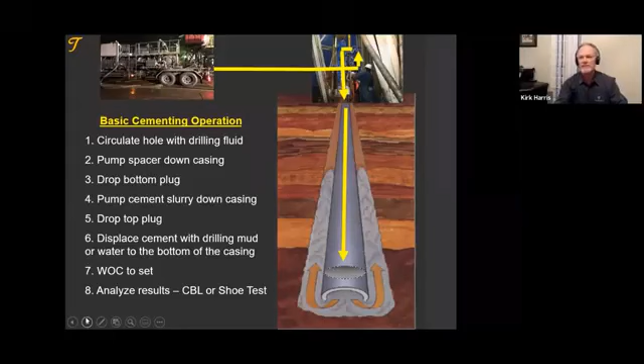We will be talking about primary cementing, but there are two other areas we could spend a lot of time on. Squeeze cementing, or remedial cementing, where we're fixing holes in the casing, fixing the cement job, or fixing formations. And plug cementing, where we're setting plugs of cement in the well for a variety of reasons, maybe to kick off and drill a new hole section, or to abandon a well. We're going to focus on primary cementing for our discussions in this introduction to cementing this evening.

And I think we are back.

So let's talk about the casing strings themselves, and again we're looking at the basics here. The first string that we set is the conductor. Offshore, sometimes that conductor is just driven into the sea floor - pounded in. Sometimes we drill a hole and cement that conductor.

On land, sometimes we use a rat hole drilling company, just dig a hole and drop some casing in there, maybe put a bulldozer on top of the casing to hold it in the ground. The first job I ever caught was a conductor pipe, and I thought, wow, this cementing stuff is pretty primitive. But it's the first short string - it may be anywhere from 80 feet to a couple hundred feet of conductor. We center the rig over that first string, and that begins our well.

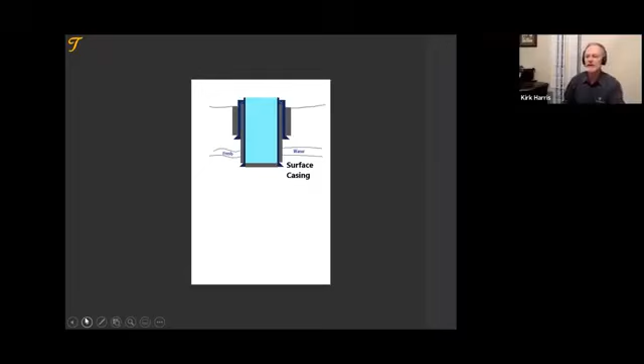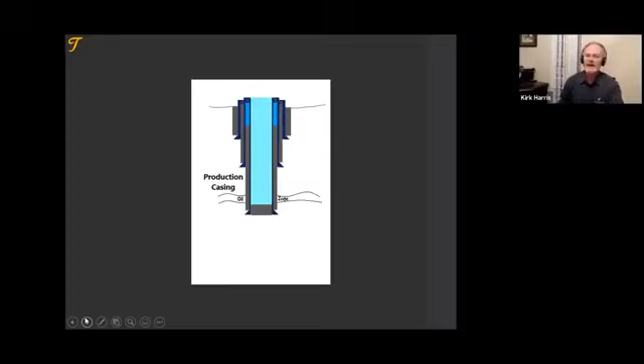Our next string might be the production casing as we telescope the casing strings into the ground, and here we'll be covering the oil zone or the gas zone. If we have not yet reached our target, this might be an intermediate string, and we will drill out and drill deeper. We might set, instead of a production casing, a production liner, or if we're drilling deeper, a drilling liner.

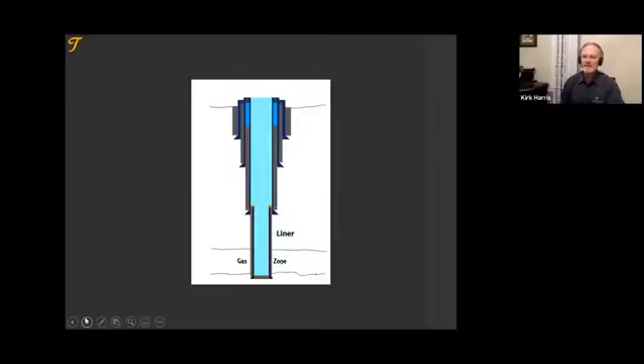Now we're running on drill pipe a shorter piece of casing, and we will cement through the drill pipe and casing, then hang the liner off on the previous casing. Sometimes we'll connect that back to surface, and that is called a tieback string, and we will cement that string in place on various occasions.

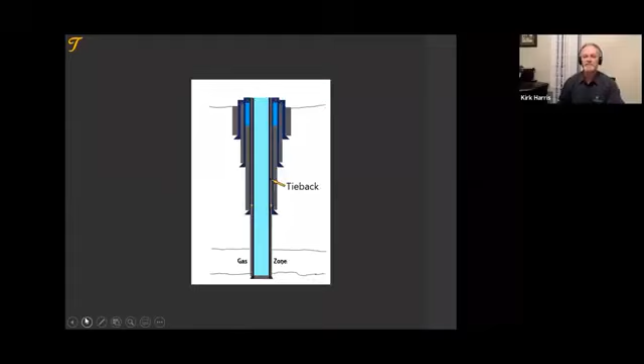Why do we cement? Why do we do that? There are 4 reasons I will list - there may be a couple more, but we umbrella these under about 3 or 4 reasons. Why do we cement? And I ask questions because I want you to talk with me. Plus, it gives me a chance to enjoy my coffee.

Why do we cement? What are the reasons?

Thank you, Sebastian. Well security or well integrity. Thank you, Adele. Or Addo, not sure how to pronounce that. To isolate, for zonal isolation as a barrier. Thank you. Thank you, Perwanto. That's right, Sheila, to provide zonal isolation in the wellbore.

That is number one, to seal formations that have been drilled. We can isolate production water zones, weak zones, and stimulation treatments. Okay, thanks, Derek, to satisfy the government regulations. And the regulations are trying to achieve, in part, this zonal isolation.

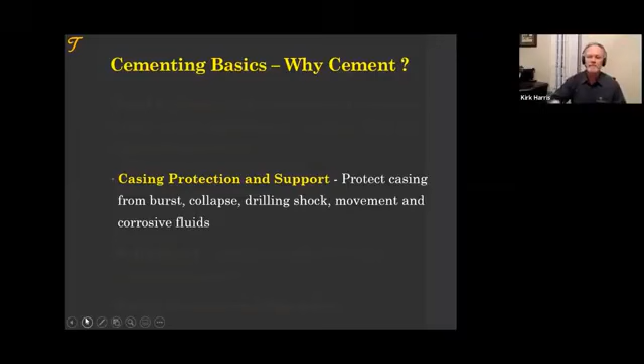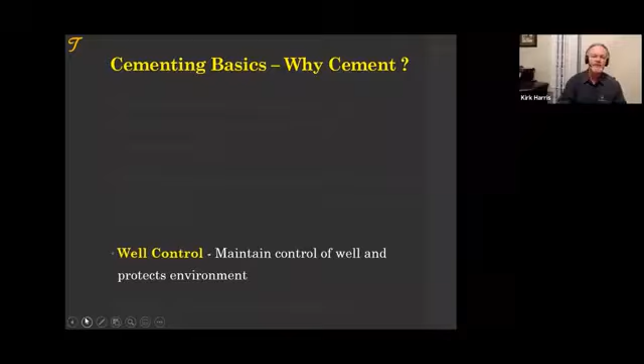Somebody mentioned, Raphael, you did, well control - to maintain control of the well. Again, we're cementing as we go down to protect ourselves from weak zones and from high pressure zones. It's a form of zonal isolation. And then finally, as you've mentioned, satisfying governmental regulations.

I don't know what you were doing last night in Australia or the Philippines, but were you thinking about your cementing philosophy? I don't know how many of you have thought about your philosophy of cementing. By philosophy, I mean a big general idea of how do you get a good cement job, how do you achieve those objectives of protecting the casing and getting zonal isolation?

When we cement, we want the cement to come up to the right spot and seal all the way around the casing. We want it to go into the right place and provide zonal isolation. Some big general ideas - cementing a wellbore or cementing a well is like, here's what you do to get a good job.

Okay, Fahid, you want to go to CBLs? We're not going there yet. Is that your philosophy? I like CBLs. To get a good CBL. What is your philosophy for cementing? Sheila, do you have a philosophy for cementing yet? If you're watching this by video, this is the part where you just get to think.

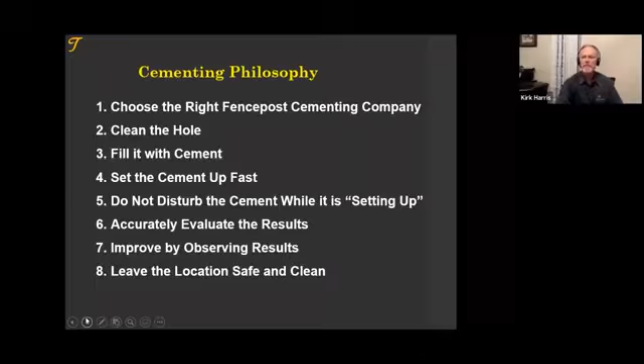I'm not making fun of service companies, but what I am saying is choose the best one. Choose the best team. Get the best team you can get.

You're going to have some engineers who know the issues, know the problems, know the solutions. You're going to have some who will just bring breakfast to the office and not have those answers.

We're going to clean the hole. We're going to liken that to the way we clean dishes in the sink. We kind of do it the same way in the oil field.

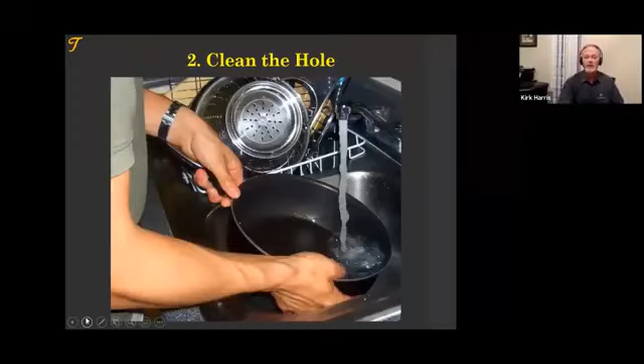We're going to fill the hole with cement. A fence post hole is easier to fill, trust me, than the oil field hole. In our oil wells, we have to pay a lot of attention to being able to get the cement where we want it. We want to set the cement up fast.

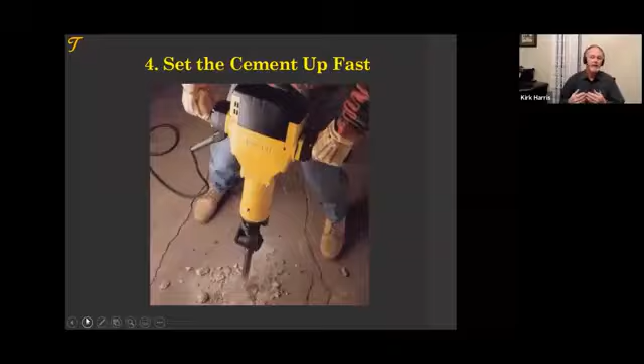We're going to have a little debate later about how to stop flow into the well. Can we do it with gel strength? We talk about gel strength and critical static gel strength a lot. Or do we need to set it up fast? I argue for setting the cement up fast and do not disturb it while it is setting up.

We talked about the catastrophic flows. Almost half of those catastrophic flows in the Gulf of Mexico occurred after cementing, and they occurred as we disturbed the cement while it was setting up.

Accurately evaluate the cement job. Sometimes the bond logs are more difficult to read than the map around Kosovo of the roads.

I would be lost in this country.

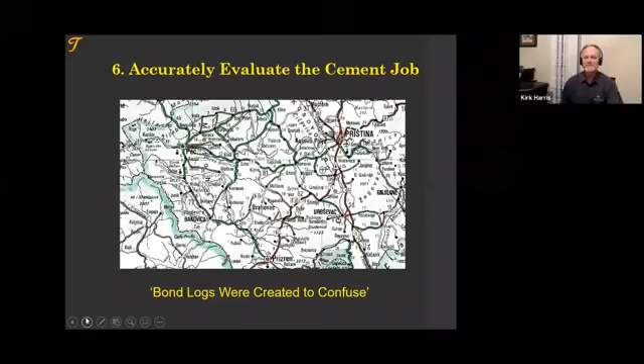Improve. We monitor results wherever we worked, whether it was at Oxy or Repsol or Talisman. We need to get above 95% success.

Because you have one success, that may not mean you're using the right answer. It has to work almost every time. We'll talk about that when it comes to float equipment, for example, here in a bit. If it's not working at least 95% of the time, you need to be working hard on a better solution.

And then safe and clean. I think this is still the world's tallest building in Dubai. They say, I haven't seen this, but they say that the men cleaning the windows do it year-round, up and down. It is clean. I don't know about safe.

Let's talk about job design. What we're going to be looking at with job design is making sure we have the right volumes of cement that we're pumping. We want to make sure we have the right density and we're pumping at the right rate. Both of these will cause pressures in the wellbore.

We want to have the right slurry design. Besides density, there are other important properties. We'll be spending an entire webinar on designing the slurry and another one on testing the slurry, so here in the future.

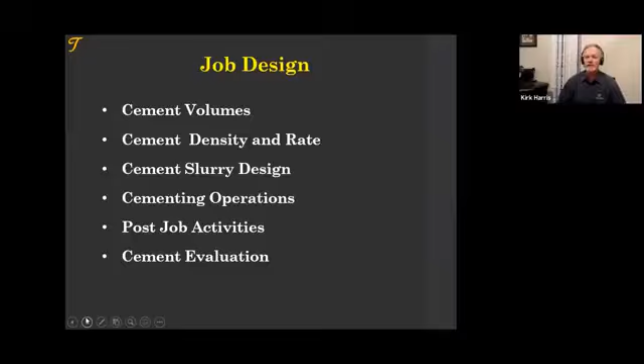When it comes to cement volumes, I have this. I actually have 3 copies here that sit around my desk. I constantly am looking at the red book. I don't know why I don't just memorize everything. I have some memorized, but I use the red book.

Many of you may have a blue book or red book on your computer electronically. I don't know, at a certain age, you can only read things on paper. It's a crazy deal. But we're looking for volumes, and we get the capacity and we get the factors for those volumes in this book.

We're looking at the open hole volume. We're looking at the casing by casing volume as we lift cement up into the previous casing. We're going to have a volume of cement that's in the shoe track. And we'll have a volume.

It's the Bible, right, Dale? And we will have a displacement volume.

Those of you watching on video, sometimes I'll shout random things, and that's because I'm receiving a text message. So out of nowhere, I just say, it's the Bible, right, Dale? Well, he said he has his red book with him.

That displacement volume will calculate from the capacity of the casing. As we do that, part of our volume may be tail cement, which is a stronger cement. We usually want 500 psi of compressive strength before we drill out and move forward with our operations.

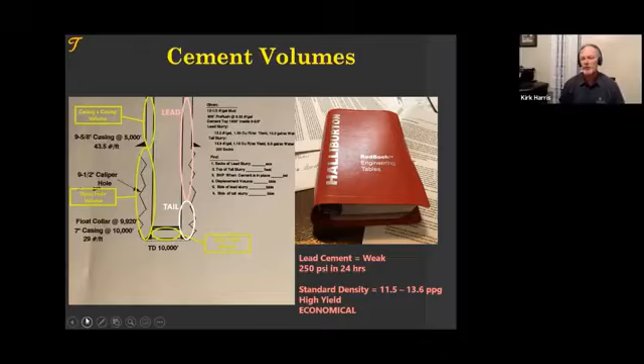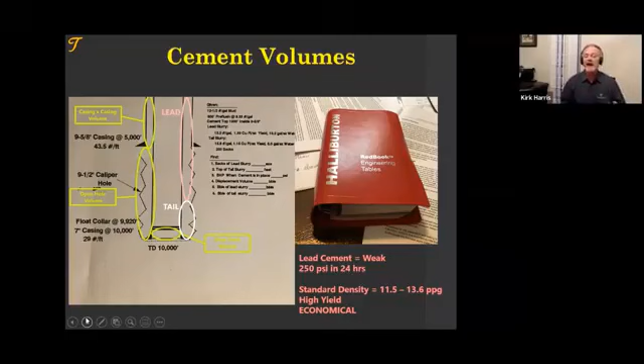In part will be lead cement. The lead cement is a weaker cement, sometimes too weak. I think Railroad Commission standards allow us to only have 250 psi in 24 hours, which means often the cement is not set when we're disturbing the casing, nippling down BOPs. It's a lower density usually, and we need that lead cement so we don't break the formation down. But we run the types we do because we get a high yield and it's economical. We save money.

When it comes to volumes, we have excesses. We can caliper the hole, a mechanical caliper that we can run, or we might run a fluid caliper to measure how much of the hole is circulating. And we'll add 15% to that volume. For a surface hole, we may run from 100 to 200% extra cement to fill the hole. And the production casing maybe from 20 to 50%. And we learn by experience.

Thank you, Christopher. That excess is not applied to casing by casing. Thank you for the comment. We will confirm these things by watching the volumes on location.

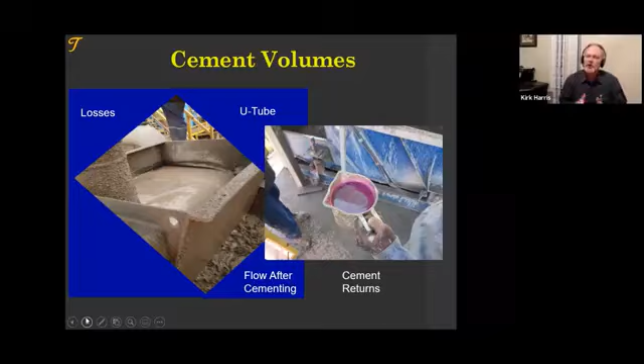When you start measuring your volumes, I would recommend that you can use an indicator as shown on the right. Phenolphthalein we can put in to indicate this base of cement and it will turn red. But measure the density because we can get indications of cement and it's just a trace of cement. It's not good cement back to surface. So we will confirm our volumes either by finding the top of cement on bond logs or temperature logs, or by measuring our volumes of good cement back to surface.

When it comes to the density of cement, the density and the rate, we're working along these two curves. To the left is our pore pressure. To the right is our frac gradient of our hole. To the left is the pore pressure of our formations. When we cement the well, both while we are pumping and when we are static, we want to fall in between these two curves. We call it the ECD, or the equivalent circulating density. We're relating that directly to an equivalent mud weight.

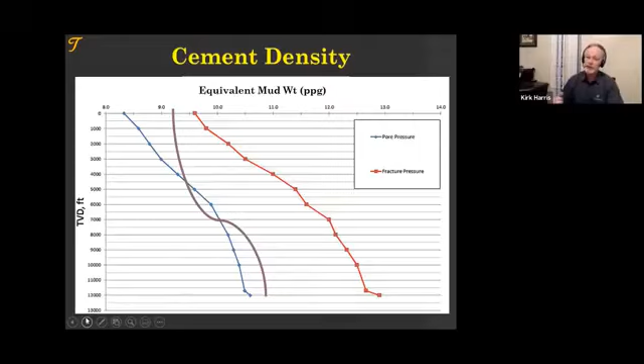If it's too high because we're pumping too fast or because the density is too much, and we cross that, we're going to have lost circulation. And if we are too low, we will have either static, usually will occur when we're static, or while we're pumping, then we're going to have an influx and a flow. So we want to stay in the middle.

The same is shown here as we go up and down the well. The previous slide was at a certain depth. This is up and down the well, our pore pressure, our frac gradient. A minimum line is drawn for our minimum hydrostatic, which is a half pound over our bottom, our highest pore pressure. But again, while we cement, we fall in between the curves. And so we wanted to design a density and a rate that achieves that.

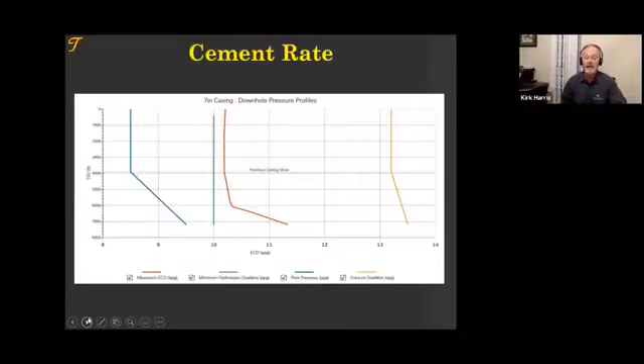But of course, when we design our density, it's part of our design that will involve our strength, our fluid loss, or viscosity, a lot of things. We even take it further with simulations, and we simulate displacement efficiency.

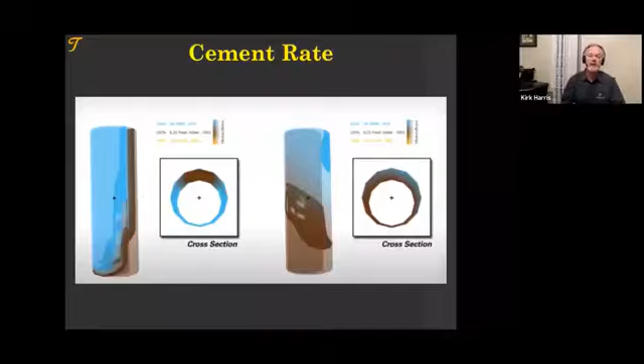The dark colors here are the cement. Looks like it's going up here, it's going up the wide side of the well. Here, we're moving the casing and we're simulating a better interface. Here we're showing channeling. I would just warn you, this is helpful, but confirm these things in the field. This is theoretical. There are a lot of assumptions made. Very helpful, the simulations are, for displacement efficiency. But remember, they are simulations.

Besides density, we have other slurry properties. What other slurry properties? We mix them up in the lab, and we have to pump them in the field. We mix them in the lab, and we'll talk about that in one of our future webinars, but we do it in a Waring blender. It's like mixing up a milkshake or a strong drink, and we mix it up and test it, and then we take it to the field.

What properties do we test or focus on with cementing? There are 5 that we test every day. Do you know what those are?

Dale is quick with the draw. We've got viscosity and fluid loss. Those are 2. Raphael, I think with a homogeneous mixture, you're talking about no settling or segregation. We've got thickening time. Thank you. Christopher, we do have the density. This Vahid says the setup time, or also the compressive strength.

Okay, I think we got them all. We test 5 every day.

One of the most neurotic positions - is there such thing as a neurotic position? Neurotic positions in the oil field is a lab technician. He does these 5 tests. I know, I've been a lab technician many times. We do 5 tests all day long, every day, every week of every year. We do test after test. And these are the 5 tests we do.

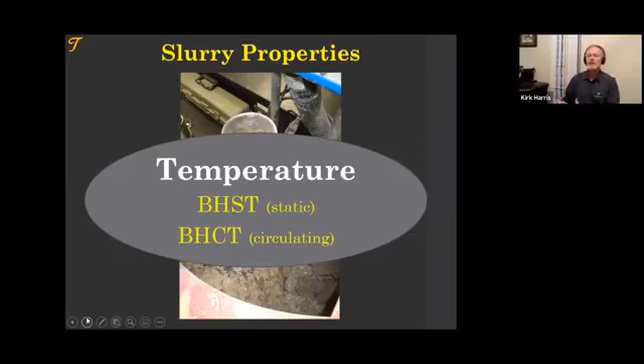The number one critical thing that we look at is temperature. It affects these properties more than anything, and affects our design. Pressure does as well, but temperature, bottom hole static, and bottom hole circulating that we can calculate, or we can use charts. We have formulas, or we have simulators to calculate bottom hole circulating temperatures. We have thickening time. These are the 5 every day.

So if you test these correctly, that's good. But if you test these wrong, you do them every day, it's hard to break that habit. We'll look at that when we talk about cement lab testing. Thickening time, fluid loss, viscosity.

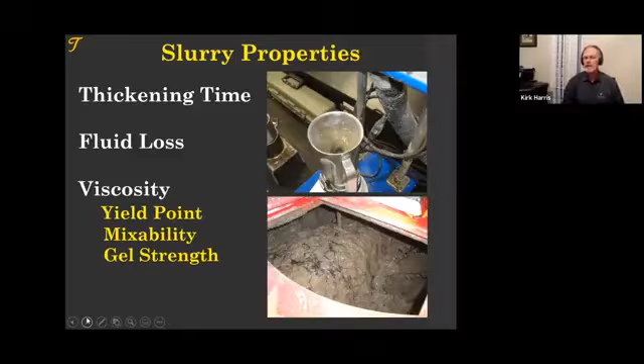When we talk about viscosity, we're talking about things like yield point, plastic viscosity or yield point, the mixability of a slurry, and the gel strengths. We can measure those in our rheological testing.

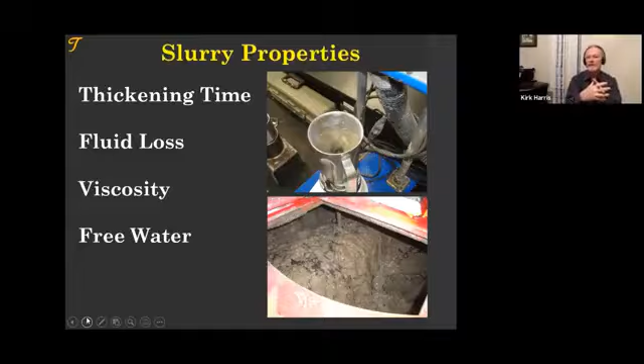Free water or settling or a homogeneous cement slurry. Fluid loss is when you press the water out of the cement with pressure. Free water is when the water floats out of the cement. It's also related to settling or the settling of solids. We see that. And we have many other tests, but these are the 5 basic tests we use.

And then finally, compressive strength. When does it get hard so that you can tap on the cement?

When we test, and here's a thickening time test, we are stirring the slurry at bottom hole temperature and pressure. And we're measuring its consistency, which is like viscosity, measured in Bearden units. But what is thickening time? If you could put a sentence on what thickening time is, what would you say? I kind of draw a picture of it here, but if you had to put thickening time in a few words, what would you say is thickening time?

What is thickening time? Leo says setup, and it's getting close. It's not necessarily when the cement sets up. It's not necessarily the setting time, because at the end of the thickening time, Dale will say when it becomes close to unpumpable. Thank you. It's the time that it's still liquid or pumpable. At what time does it get too thick to pump? At that point, it still may not set up for a long time. But even on thickening time,

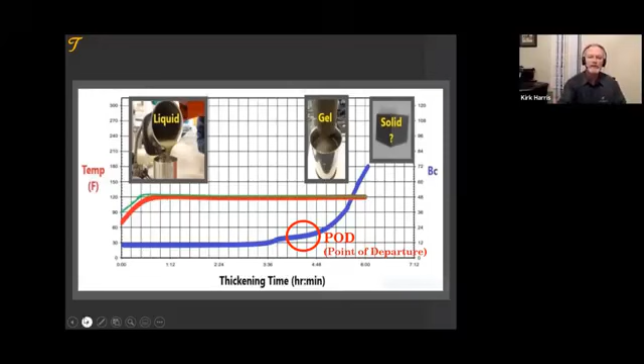Some will use point of departure as the thickening time - as we gain a little viscosity, let's call that the thickening time. Others will use, especially for lightweight cements, when it reaches a measurement of 40 Bearden units. Most of the world uses 70 Bearden units. API, for purposes of testing neat cement, uses 100 Bearden units.

I guess one lesson about point of departure is don't worry when you hear new terms, just figure out what they are. They may not mean that much. Some of the things we did in research, afterwards we said, well, we were wrong there, but it already got out and people are talking about it and using it, and we couldn't keep the genie in the bottle.

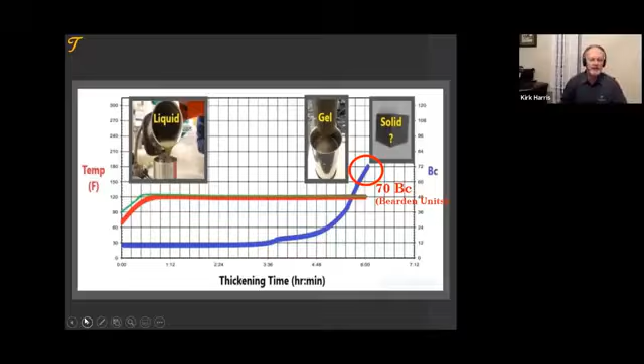When we talk about job design, we've talked about volumes, density and rates, slurry design. Let's talk about cementing operations just a bit. Then in other webinars, we'll talk about post-job activities and cement evaluation.

Talking about operations, let me introduce you to the equipment we use in cementing. I throw it into these categories: we have the bulk cement, the mixer, the pumper, monitoring equipment, and then we have the tankage that we use. And we have a few other things like centralizers or float equipment, and we'll look at those.

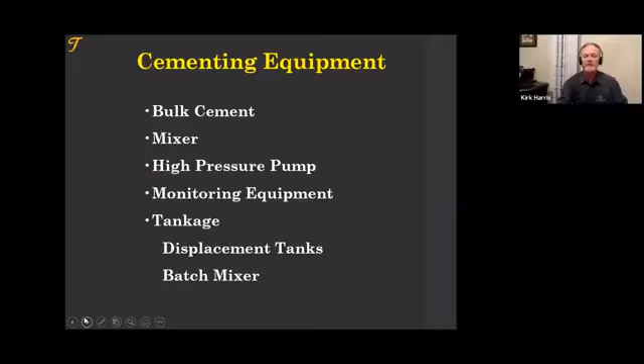We're going to weigh our cement into the scale tank, and then take it from the scale tank and put it over into the blend tank. We will then cut our additives into the cutting bottle. Whatever additives we're using, we'll take half of those and put them on top of the cement. We'll weigh more cement, put it on top of that, and we will layer cement, additives, cement, additives.

And then we will blend those by moving them pneumatically - dry cement with dry additives, 1, 2, 3, and then to the truck or to the barge if we're going offshore. Every time we move it, we call it a boxing, and we're blending the cement to get a good mix.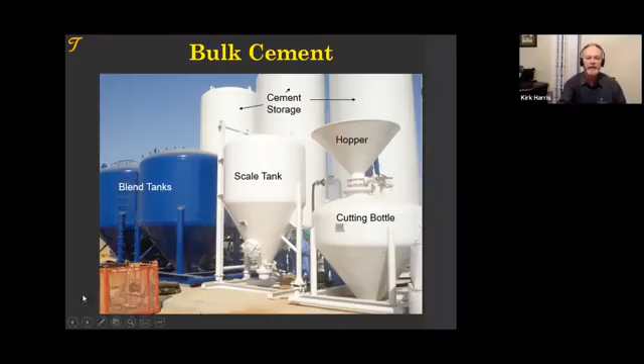The additives at this location - this happens to be actually in Los Angeles, California, almost downtown Los Angeles - they have a cementing plant, I think it's still there. The additives are inside, and the scale tank is there too. It's layered into the blend tanks, and then we go 1, blow it back over here 2, blow it back over 3, and then send it to the truck.

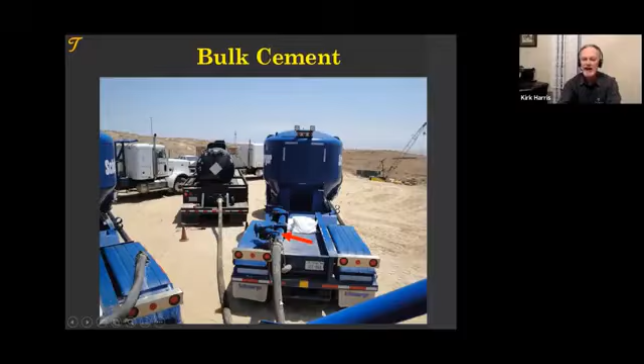We sample it, keep a sample of the bulk plant cement, and send it to the truck. The truck goes to location. Here's the truck on location. We're going to take that cement, sample it again on location, but send the cement through the hose. We're going to blow it in there at about 30 psi, and that's going to blow right straight to the cementing unit, and the cement will go in.

Do you see this cementing unit here? Do you know whose cementing unit that is? Can you tell? It's not blue. And Andres, it's not - it is red, Corey, but it's not Halliburton. I just want that to be clear. This is not a Halliburton unit that I'm showing.

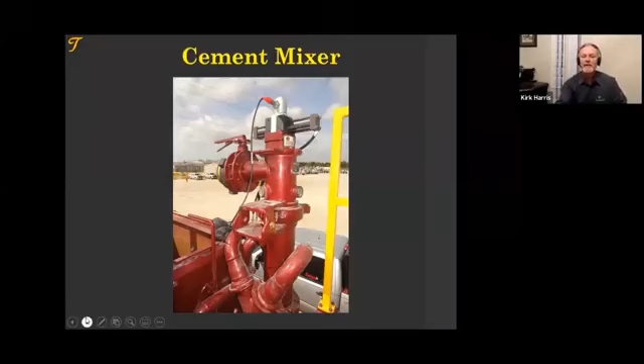Okay, now that that's clear, we're on video - that's not Halliburton. The dry cement goes in here.

The dry cement will go down. There's a water jet coming in, and there's a jet here where we will wet the cement. It will drop into the tub. We'll stir it up in the tub, and we'll recirculate it back through - so we have a recirculation going on, similar to the Halliburton unit and to other units. The dry cement goes in, is mixed, goes into the tub, and then is recirculated back into the mix. It is a recirculating unit. It goes into the tub, and the tub is being stirred with paddles.

The first time I ever cemented a well, I was 22 years old. I went out to cement a well and forgot to turn on the agitators. It was a squeeze job, but the cement was just dust, and by the time I could see cement, it was all dry powdered cement across the entire tub. I didn't know what was going on, so I started hitting it with the water hose. Then I remembered to engage the clutch to turn on the paddles, and I did that. Before long we broke it all up and had a beautiful cement. But my first time on the cementing unit was almost a disaster.

We have a lot of mixing energy going in as we mix the cement, and by recirculating it in the tub, we add mixing energy. Sometimes we have trouble mixing this and going down hole. We have trouble mixing the cement, and a lot of things can happen.

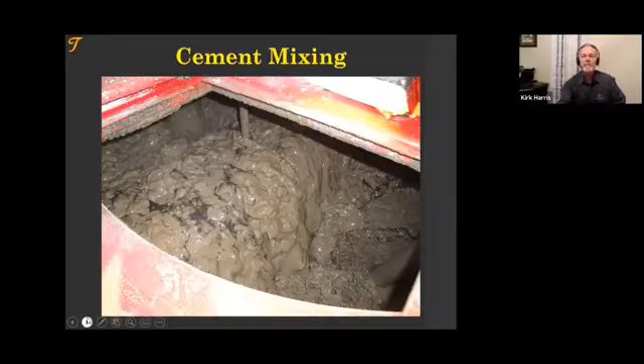Not only if you're 22 years old and you're not a good cementer, but we can pack off the cement. We can have poor delivery, we can have some issues, it can be too thick. We are going to measure to make sure we're having the density confirmed at this point.

We can pump it down hole, or we can batch mix it, pump it into a tankage, into a batch mixer, and make it a consistent, beautiful cement going down hole. I'm working for someone right now who does not like to continuous mix. He likes to batch mix, and for good reasons. The last job I went out on, it was hard to mix the cement, especially on some land units. So sometimes we will batch mix, but sometimes the jobs are so big we have to continuous mix.

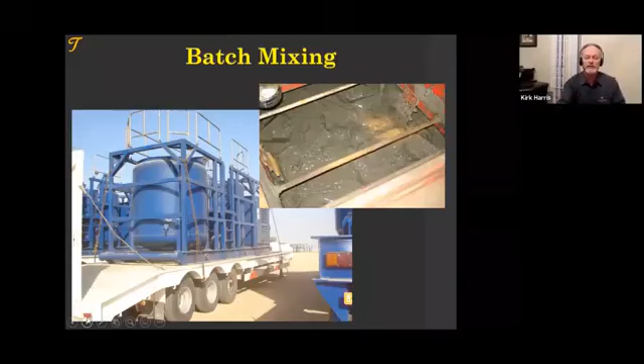So we will take cement, whether from a batch mixer or from the tub itself—here's the tub on this particular unit—and that will be sent either gravity fed or boosted to the suction manifold, which will then enter the high pressure pump and be discharged to the rig floor and through a cementing head.

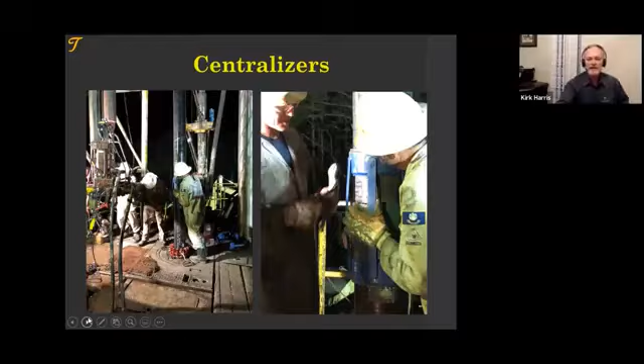We had already run the casing at this point, and when we ran the casing we would put the centralizers on, a very important piece of equipment. Here we're shown putting the centralizers over a collar. This was on a job not too long ago I was out on.

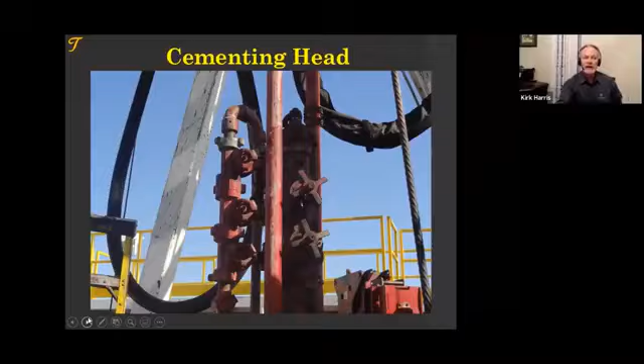Then, as we start to pump cement from the unit, the casing's already been placed. We're going to pump the cement through a cementing head. In that cementing head, in this case, we have a double plug container: a bottom plug which has a disc that will burst so we can pump cement through it, and a solid top plug—you can't pump through this one. When it lands at the bottom of the well, the job is over.

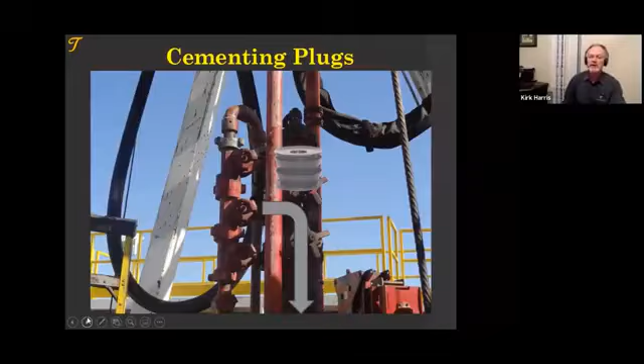So we'll put those in the cement head and circulate the well with drilling mud. We'll also pump our spacer at this point, then pump through a different valve. We'll pull a plunger out and allow that bottom plug to fall, and pump all of our cement on top of that bottom plug. We will then displace, pulling the plunger to allow the top plug to fall, and send the top plug down. When the top plug lands, we should have all the cement on the outside, and our displacement fluid on the inside. When we bump the plug, here's what we end up with.

Our bottom plug is hit, and now this top plug is going to land on top of it. When that occurs, it lands on a float collar. We should have our shoe track filled with cement and cement up our annulus all the way. If the float collar fails, all this cement we lifted wants to come back in because we have a pressure differential. This float is a check valve that blocks that.

If it fails, what do we do? Cement's trying to rush into the wellbore. We hold pressure. We do that by shutting in at the rig floor.

And we trap pressure. Now here's something we never used to do, and everybody does it now—I don't know if I've ever talked about this. If the floats fail, we get a volume of cement coming in, and everyone wants to pump that back down. I'm not a big fan of that, never was, but everyone does it, so maybe it's okay, I don't know. I usually just like, okay, it failed, let's shut it in at that point.

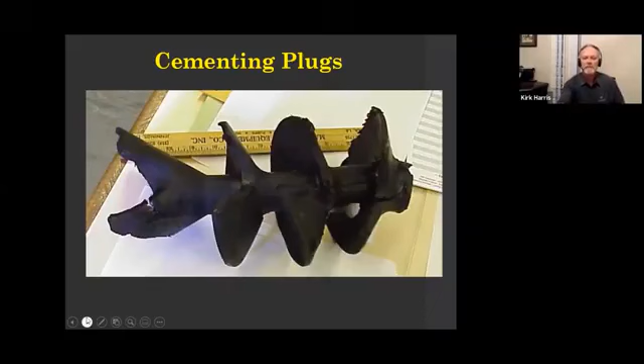But when we bump the plug, if we do, and the floats do not hold, we talked about that. What do we do if it's in this position? What if we're in a horizontal well and the floats fail? What do we do? I bring this up because this is one of the aspects of what happened at Montara.

The floats failed, and Montara was a horizontal well. It was a sidetrack that went horizontal, and it was finished in the production zone. I don't remember if it was above the water leg, I'd have to look, or if it's down into the water leg, but it was a horizontal well.

What happens if the floats fail in a horizontal well? What do you do? The cement's going to try to flow back in. So what do you do?

We drilled a few hundred horizontal wells in a certain area. And the first 200 wells, our floats, listen to this, our floats failed 25% of the time. And something interesting happened when those floats failed.

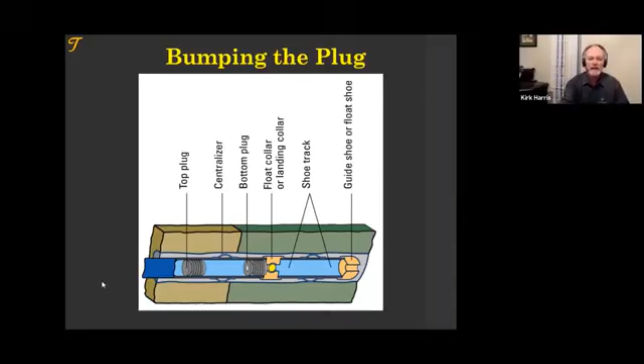Yeah, I said a wet shoe - sorry, that's the terminology for that shoe track. Let's back it up. This shoe track, if you can't pump through it, it should be filled with good hard cement. But if you can pump through it, or if you drill it up and there's nothing there, then we call that a wet shoe - a shoe track that doesn't isolate.

Montara occurred 9 months before Macondo. One of the main causes likely of Macondo was the fact that the cement in the shoe track had disappeared, maybe was unset, was contaminated. Regardless, it's likely that the flow came up through the shoe track in that case as well.

Well, let's move on, we're going to have to get going. Let's talk about best practices that you use. What best practices do you use? I'll show you a couple here.

One I have here next to me, I better know this. I don't know if I know it well enough, but every well in the Gulf of Mexico, post-Macondo, you better adhere to the RP 65 or the API standard 65.

What we do and what I recommend - it's really good stuff in here - but take what's in here and make it more specific. Apply it to your local well or your local field. As we go around the world and look at some of these wells, you need to know what works in your area.

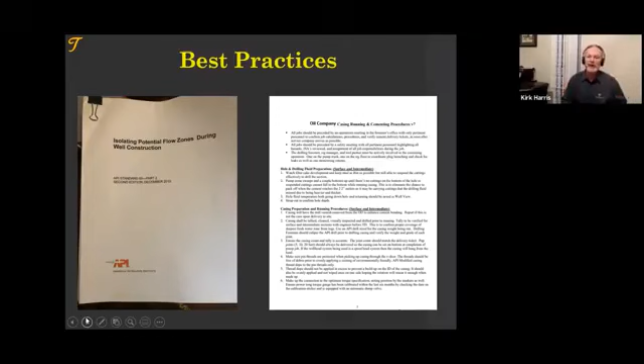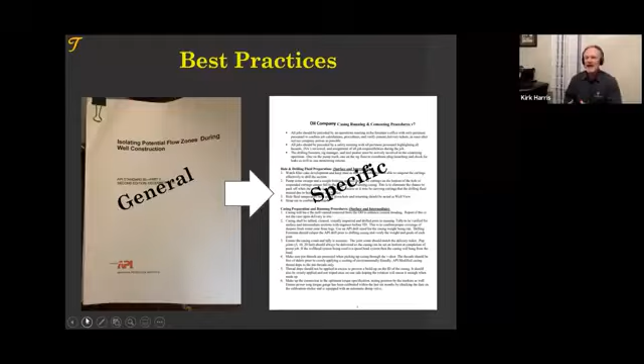So you take the general - and there's a lot of general stuff in here, like thin the mud - and you should have a document for every operation you have. The document we're using here for this particular oil company is a 14-page document of exactly how we run casing and cement these wells.

We take some theoretical - we're going to talk about some of the theory that's in here - and we operate not on theory, although we'll use it, but on what we see in practice occurs. I'll show you an example of that. So take the general and the theoretical and apply it specifically to the practice of your field.

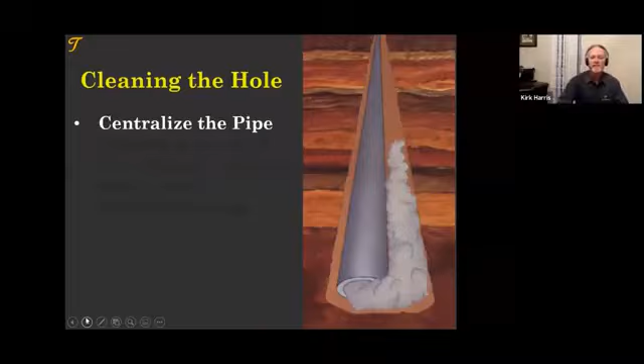I'm going to touch on just a few basics or general, and let's look at cleaning the hole. Just like there are 5 tests that we do on the cement for every job, there are 5 things that we do to clean the hole on every job, or that we can do in the industry. The first is to centralize the pipe. The second is to condition the mud.

I like to compare these to the way you clean the dishes in the sink. I don't know how many of you do that - I think I used to do it a lot, but then I got really busy, so my wife says I don't do it that much. I say I do clean the dishes, but before I can do it, she usually does it before me. So it's kind of one of those deals. Think about cleaning the dishes - I look at it as the way we should clean the hole.

When we centralize the pipe, we do so that we get flow all around the pipe. When we clean the dishes, we move the plate around so that we touch all corners of the plate. When we condition the mud, we get the mud in a condition where it will go out of the hole, where cement can replace it. In the kitchen, this is one of my problems - if you take the food on your plate and you don't touch it for 1 day or 2 days, you can't remove that food from the plate. It's very difficult. So when we condition the mud, we pump a thin mud ahead to get it moving.

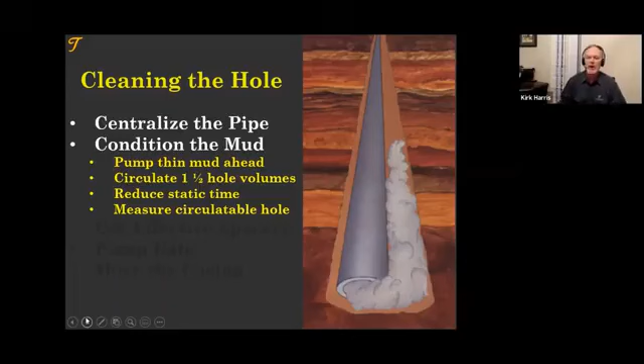We circulate hole volumes, 1.5 or 2 hole volumes. We don't let it sit around. And we can even measure the circulatable hole, look at our standpipe pressures and some other things to condition the mud properly. We use effective spacers.

What spacer do you use when you clean a dish? You might put soap in it, but you use water - you use a turbulent spacer. And Atif, I'm answering your question here - I've worked in-house at several operators and often will pump up to 200 barrels of a thin mud before the spacer. We found that to be beneficial, yes.

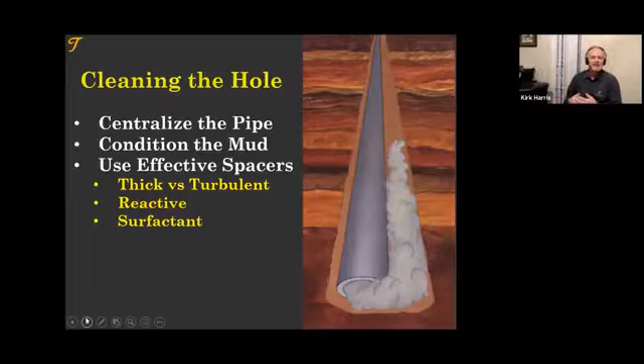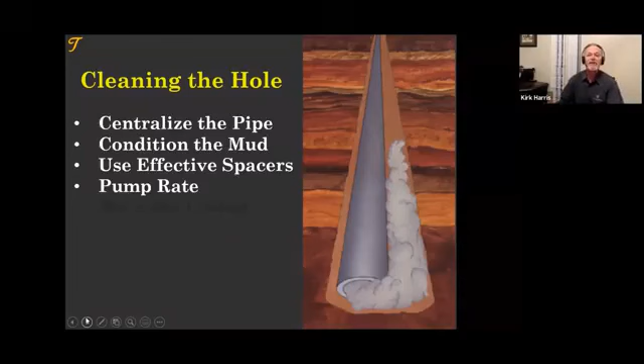From the spacer, we can argue thick versus turbulent, reactive, whether you put soap in it for oil-based environments. In the kitchen, we use water - when we open that faucet up, we want a thin fluid to come out to clean our plate in turbulence. I'll just say that much. We don't want thick fluids coming out of the sink to clean our plates. We will turn the faucet on full speed or a high flow rate. We want that in the oil field as well.

And we want to scrub it - we want to scrub the plate. A very effective way to cement is to rotate or reciprocate the casing while we pump the cement.

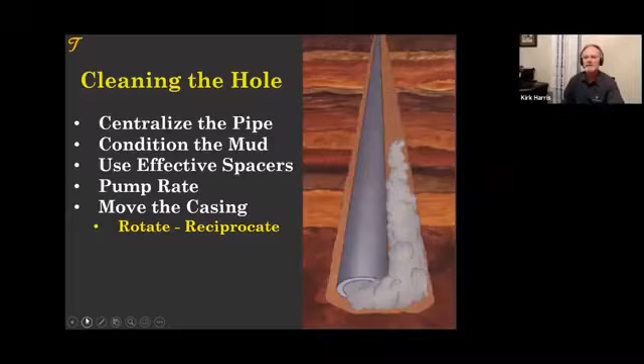Well, let's take some time and go around the world and do some more cementing if we can. We're going to go for about another 20 minutes. At the end of that time, we'll have time for questions and answers and discussion as well.

Let's cement the world a bit. We're going to look at wells that are cavernous, full of gas, hot, cold. I used to call wells ugly—I'll ask you what an ugly well is here in a bit—corrosive and crooked or deviated.

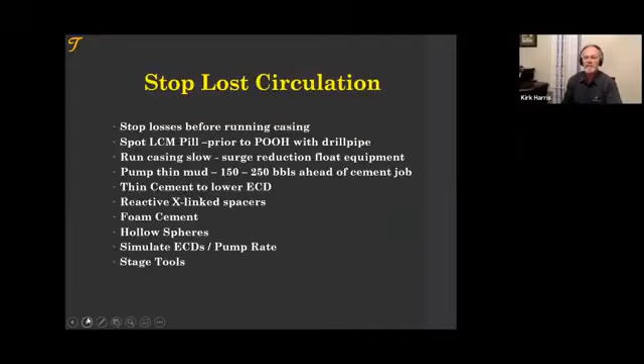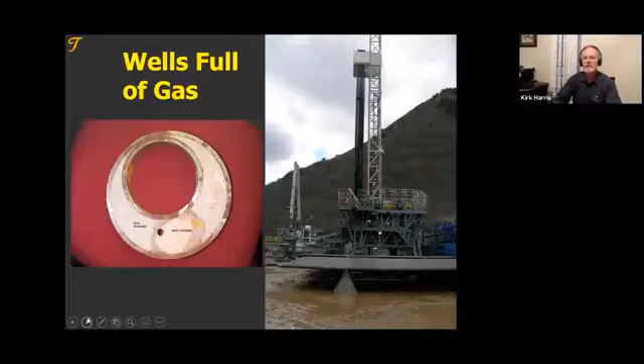How do you stop the flow? This is very important, and we could spend a lot of time on it - we're going to have a separate webinar explaining this specifically. Critical static gel strength, you hear about it a lot. I was just at the University of Louisiana in Lafayette, and that was a main concern of what they're testing for. Let's design for critical static gel strength - I want to clear up and talk about this. This concept was written about and is even referred to in an API document, a paper that refers to critical gel strength written 40 years ago. It's kind of old theory or old testing.

Critical static gel strength is taking the overbalanced pressure times 300, dividing that by the length of the cemented column and the clearance - we call it the effective diameter, the difference between the hole size and the casing size. We calculate the critical gel strength, then test it in the lab, measuring the time it takes to get from critical gel strength to 500. The shorter that is, the better.

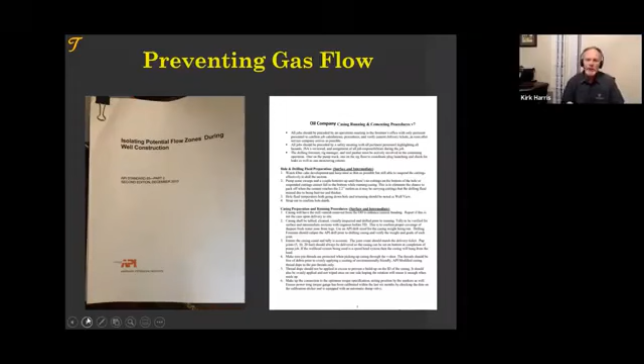The problem with this is that gel strength does not stop flow, in my opinion. It stops the percolation of certain size bubbles, but you need set cement to stop flow, not just gel strength. So when we're looking at what stops gas flow, make sure we write it from practice and put it into our local practices. Here's one local practice we have.

Very specific: the casing will have the mill varnish removed from the OD to enhance cement bonding. This is a different kind of gas flow - it's gas flow along casing cement.

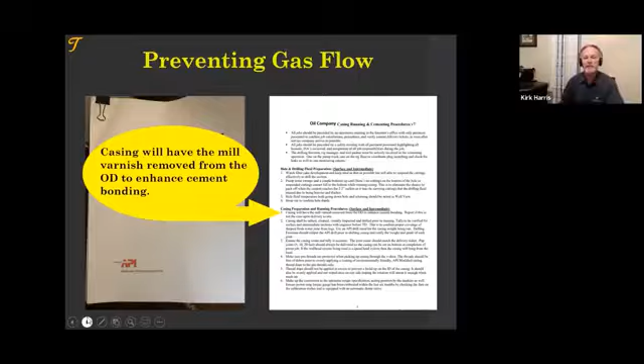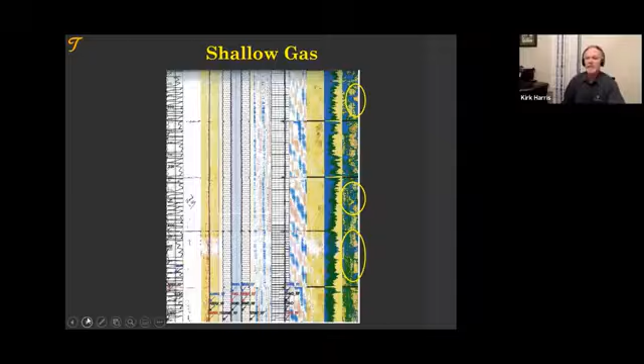If you start operating in the world of critical static gel strength, you will not solve this problem. We have to think of it in more practical terms of compressive strength or mechanical barriers, or some other thoughts.

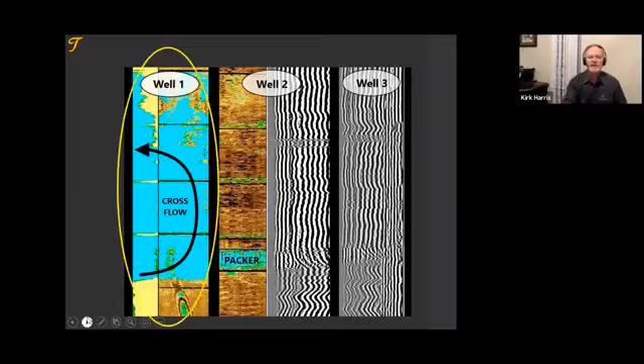Compressibility is one way to stop gas flow. You might use a compressible cement, a fast setting right angle cement, or set a liner top or an inflatable packer. Low fluid loss will help stop gas flow and avoid disturbing the casing. That well that was percolating gas before - we disturbed the casing, and here came the gas.

Philippe, no problem at all. Philippe is asking, could you describe the hollow sphere? There are a few different kinds, but they're either a pozzolan sphere, just a little microscopic sphere full of air - a hollow sphere we put in the cement to lighten it. It can be a pozzolan sphere that will crush under pressure, or a hollow glass sphere that's rated for pressure, giving you a light cement that's strong. That's what we use the hollow spheres for.

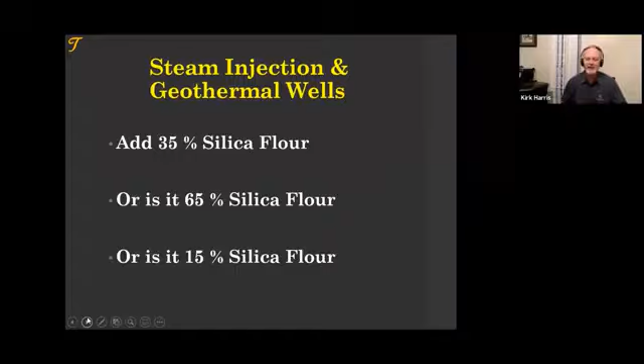I want to point this out as far as steam injection or geothermal wells. Here's a big problem, it's in deep water wells this occurs as well. You cement the well and you have losses, and so you do not get cement to surface. For a geothermal or a steam injection well, you want it to surface. What do you do at that point? What do you do if you have losses and the losses are low, or you feel your weak zone is quite low and you have total losses?

We get on this well, we start to circulate before we cement, and we have losses. And we pump our cement job with total losses. What do you do, not on the next well, what do you do on this well at that point? We slow down. It doesn't help. We still have total losses. What do you do?

What would we normally do? I remember the first time I did this. I'm not saying it was a mistake, I'm just saying I didn't understand what I was doing. But what do you do? And this well is an example of that.

Well, we have to cement the well. And we can go out and we can fix it at that point, but we're on the drilling curve now. Or while we're pumping cement, we get losses in the middle of pumping cement. What do we do at that point?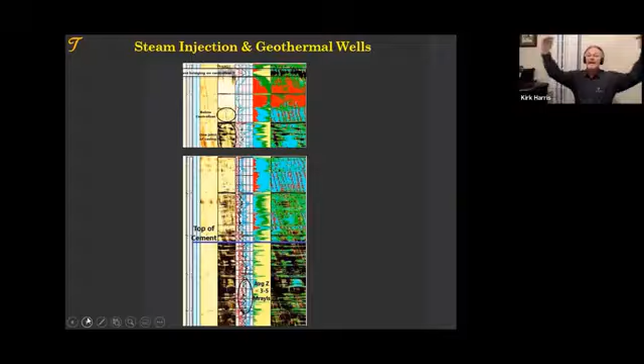Thank you, Derek. But when we're through with the job, we pump cement down the top. We do a top job to fill with cement. And as we do sometimes, that cement goes away. So we pump another top job and that goes away. And the final top job seems to work. And look what we end up with sometimes. We get top of cement somewhere here, and then we get top of cement hanging on a collar or a centralizer.

And we have solid cement to surface. We have solid cement here, and we have a gap. And then we apply steam, and what happens? Casing and casing, we have a trapped area, uncemented, and we collapse the casing. The annular area bursts or collapse the casing. A common issue. Be careful.

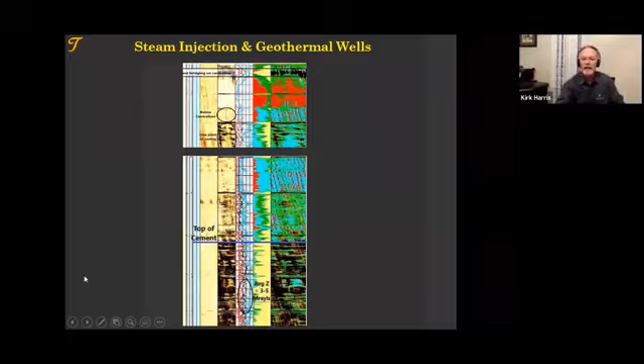There is a way to do a top job to try to get rid of the gaps, and we need to be aware of that. So for steam injection wells, we're trying to protect the casing. We want it to last. So we put silica flour. It probably is going to be lightweight, a lot of it. And we also use those hollow spheres and foam as insulators.

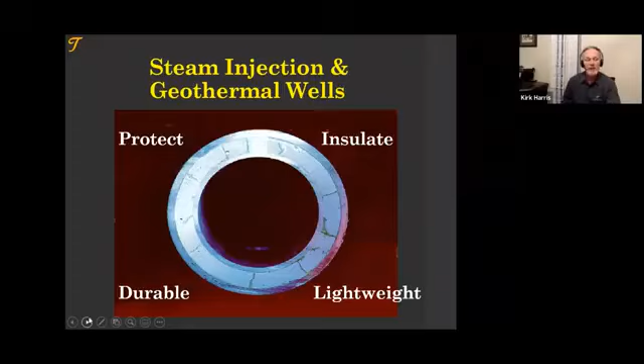Note taken, Derek. The only problem is we hate poking holes in those steam injected wells, but point taken. For the steam injection wells, we can run foam cements, hollow spheres, resilient cements with lower moduli of elasticity, or corrosion resistant cements.

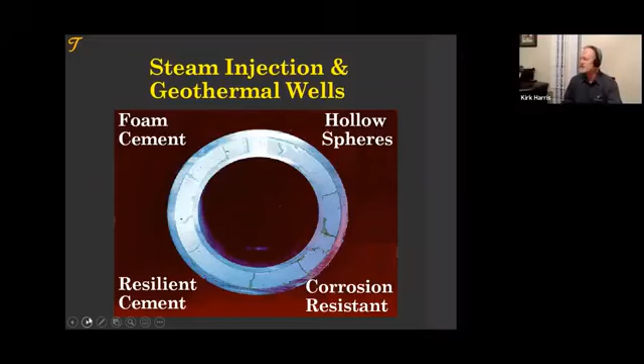But there we are cementing across, also in the Arctic, in Alaska, cementing across the permafrost. Here we're in western Siberia. When we do that, we use an antifreeze, so to speak. We design antifreeze cements, instead of water it's antifreeze kind of water. We keep the heat of hydration low so we don't melt the permafrost significantly. And we test the cement for freeze-thaw, that thermal cycling, only it's freeze-thaw cycling.

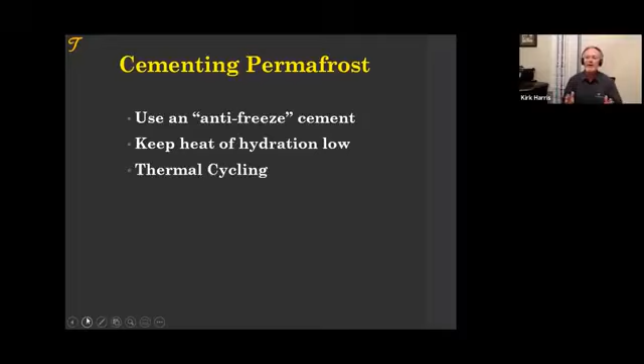When cement sets it exhibits a heat of hydration. It's an exothermic reaction. Here we show the difference of a very hot cement. If you put it in a vacuum tube, it gets really hot. Our Class A cement goes up to 150 degrees as it sets, where the cements we'd use for the permafrost are down lower.

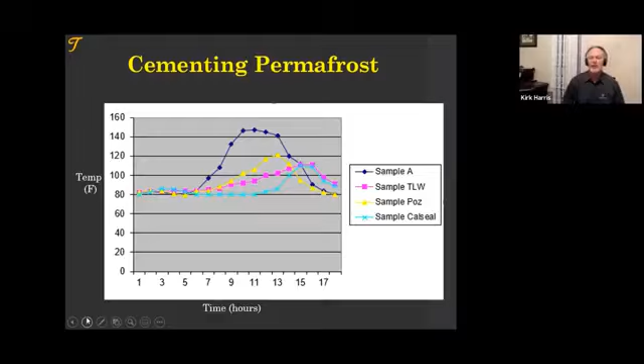These samples were put in the side of a volcano in Sumatra. Sulfuric acid over weeks or months will dissolve the cement. On the right is a corrosion resistant cement, on the left is not.

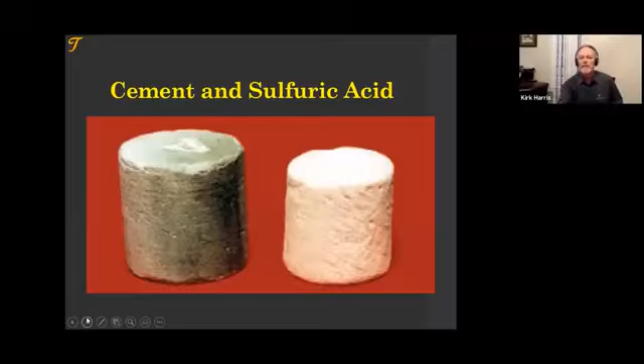Hydrochloric acid - we tested some samples with hydrochloric acid on cement that melted the cement, because some of the additives in that cement would dissolve. We're not acid resistant, we're very acid soluble.

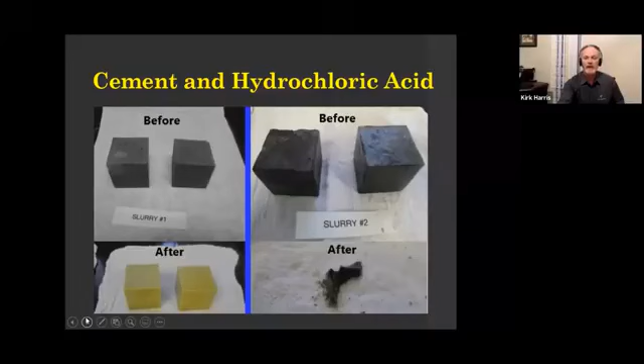When we cement corrosive wells, we use additives to lower the acid solubility. We also use additives to lower the permeability. If we can't get into the cement, it's hard to dissolve it. So low permeability is quite effective.

Certain additives we'll use are pozzolans, or latex. The anti-corrosion resistant cements are calcium aluminate cements, they use calcium phosphates - the things that protect your car from corrosion protect the casing and the cement. And we expand the cement to tighten the bond so we don't get corrosive fluids traveling up through the cement.

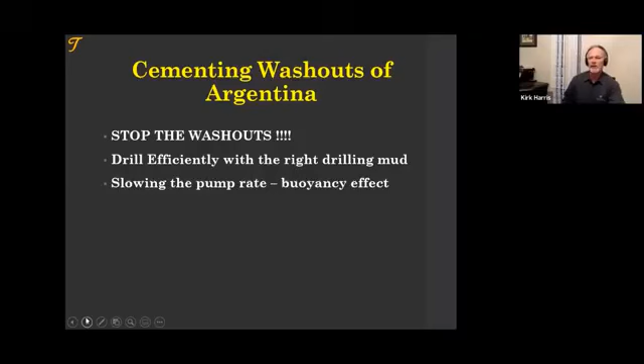So we need to stop the washouts, use the right drilling muds. If you have washouts, you can slow down and use buoyancy effects instead of velocity effects to cement the well. And finally, we'll close with cementing crooked wells.

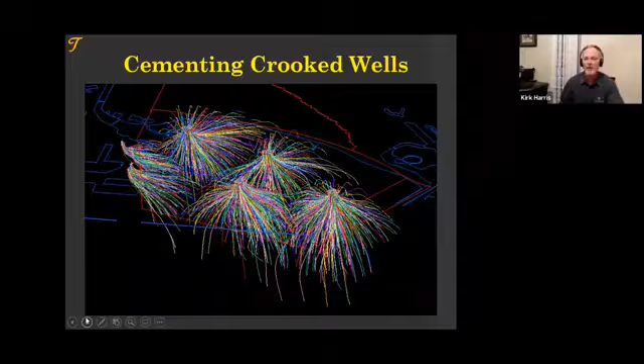Here is a schematic of all of the wells being drilled in this area off of these places. 1, 2, 3 - here we're showing 6, 4 major places and a couple small places. Those are places we're drilling wells, here's one. We're drilling them off this island. Do you know where this is?

One of my favorite places in the world. Where is that? Anybody been here? Great place to visit, great place to cement wells and do work. Thank you, Mark, I didn't know you were there, Mark. Hello. Correct.

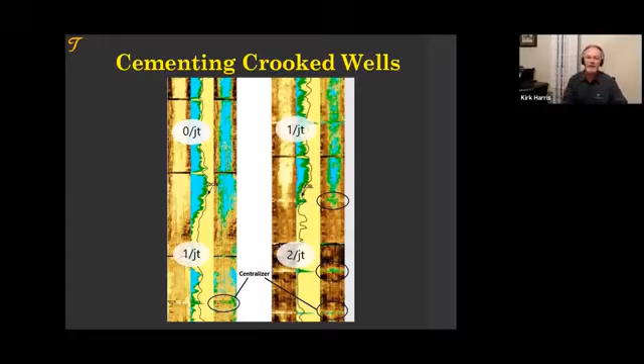Cementing is critically important to the industry. Sometimes I believe the oil companies try to kind of do it on their own or figure it out on their own. It's not that easy. We've been doing it for 40 years and we still learn something new every day. Sealing the well bore is critically important to the industry, especially during this time of the political things that go on and the release of gas into the environment and environmental issues. We need to seal the well bore.

Designing the job requires an understanding not just of a document, but of the actual field you're working in, and to really focus on how to cement that well and the challenges that are unique to that situation. You need to pay attention to the details. It needs to be specific. It needs to apply. As we just saw, cementing operations are very diverse, very difficult challenges, but what an incredible challenge.

I've had the opportunity to travel the world, work with some of the most incredible people in some of the most beautiful, even if sometimes ruggedly beautiful places. And the challenges number in the thousands, the different challenges you find in cementing engineering. So I hope you continue the journey with us as we talk about cementing and this, what I believe is an amazing discipline.